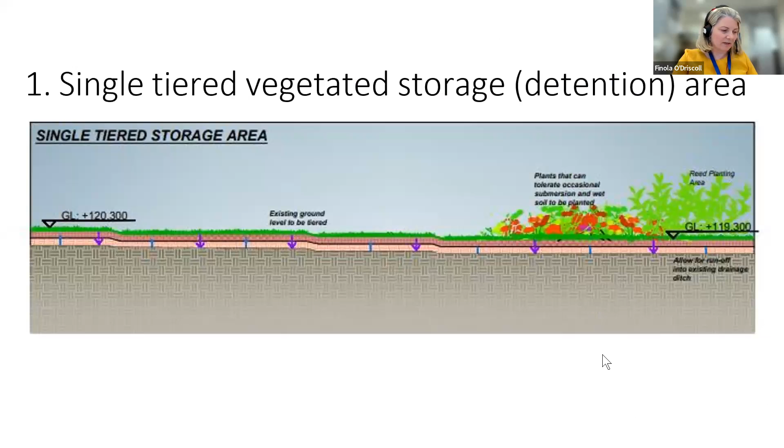So I'm going to introduce Pádraig. Pádraig graduated from Dublin City University with a BBS in business studies, and later at UCD an MBS in business studies. He has over 25 years local authority experience. He's currently Director of Services with Carlow County Council, which includes responsibility for the delivery of infrastructural projects, roads, active travel, URDF, special capital projects. He's the exemplar - if you want something done, ask a busy person, because he's presenting a few presentations as part of this series. He's also got responsibility for the environment and climate action brief, and he's been promoting the assessment, development and implementation of nature-based solutions into the capital works projects of the council. So I'm delighted to introduce Pádraig.

Good afternoon. By way of introduction to this item, to give a bit of background, over the last few years attending webinars like this, conferences, and a lot of subcommittees that our staff would be on, the whole concept of nature-based solutions has been raised and presented. We had been researching into them, and the detail coming through, but a lot of the detail was in relation to examples that were maybe EU based or UK based.

We had a cross-functional team meeting ourselves here in the council, and I basically asked the engineers mainly, had we got a nature-based solution for any of the works programmes that we have? Like many local authorities and other public bodies, we have a substantial number of projects in the pipeline and coming into design - a substantial URDF urban renewal project for Carlow Town, active travel, the roads programme, various public realm enhancements, and obviously the housing programme. So we didn't really have anything - we were basically doing conventional surface water solutions. So I asked the team to go and have a look at possible nature-based solutions that we could integrate into one of our projects.

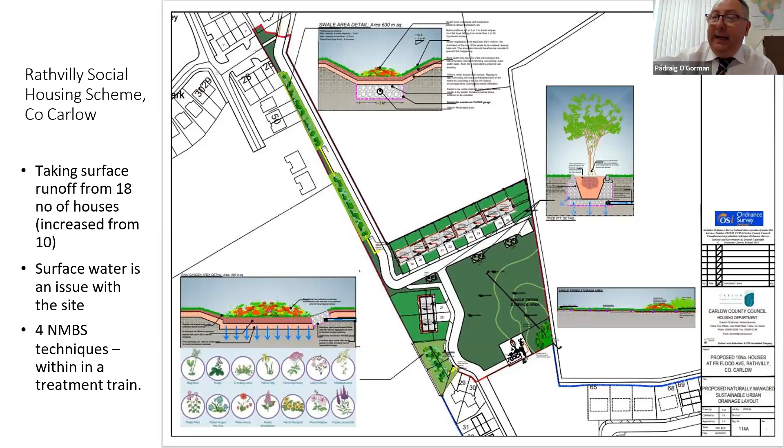Next slide, please. So the first element was to have the single-tiered vegetated storage area. This involved creating a tiered existing ground level, selecting a number of plants that can tolerate occasional submersion and wet soil to be planted in the area, and also a reed planting area. So pretty straightforward, and the detail of that was readily available.

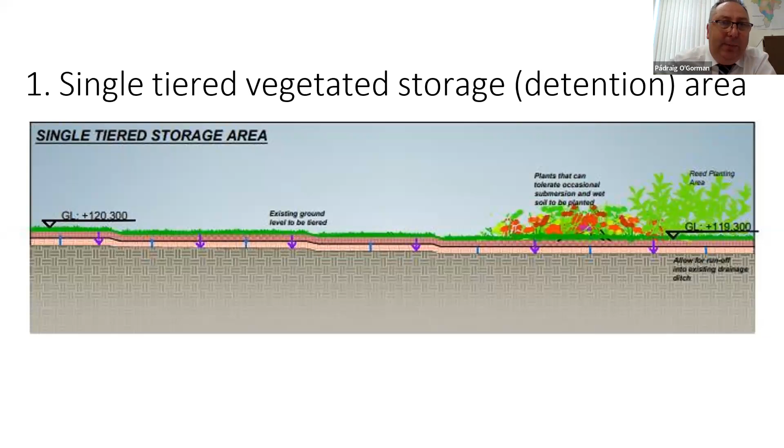Next slide, please. I suppose the main feature then was the actual vegetated swale. Again, the detail was all available in relation to the base that is required, the level of topsoil, the specification for stoning, draining, and then the actual vegetation to be used both on the slopes of the swale and the rounding of the swale, and the various planting then to be in the actual swale itself.

So again, over a period of time, they had tic-tacked with the various contacts in relation to getting that information and determining the proper solution for this site in relation to that specification for the swale.

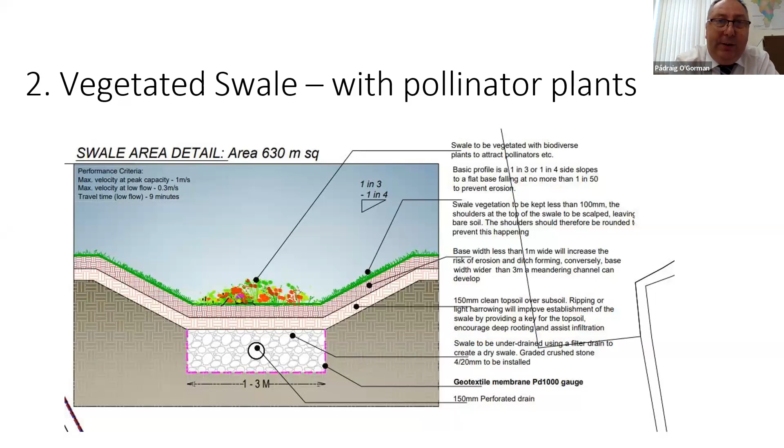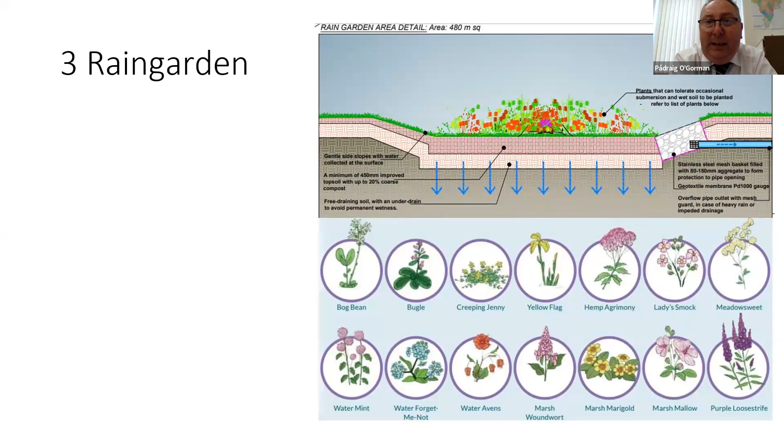Next slide, please. This was the rain garden over to one side of the site. Again, we selected the various specifications that were required, and in-house we contacted our town gardener, Michael Buckley, at the time, and Michael came up with a range of plant species that would assist and be suitable to maybe more wet ground conditions. So he came up with those varieties and incorporated them into the overall design for the scheme.

Next slide, please. The 4th element for the nature-based overall solution was the tree pits. And while this slide looks quite simple, there actually is quite a bit going on here. So we have, first of all, detail in relation to the positioning and specification of the trees. And this is in accordance with DMURS.

Also, specification there in relation to, depending on what species of tree is selected, the proper spacing for it so that it can reach its full potential and maturity. The design shows here that from the roadway, excess water can get into the tree pit, and over here then also a drain so that the actual tree pit doesn't become waterlogged, which would affect the root growth and the growth of the tree.

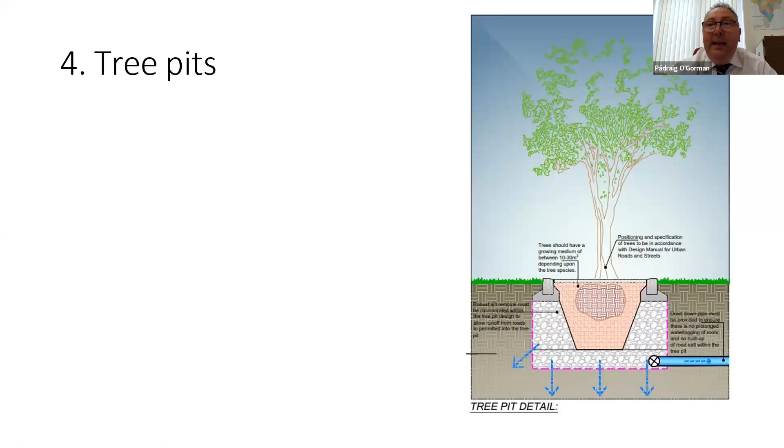Or it doesn't allow for road salt to be deposited and kept in the tree pit. So while it looks a simple design, a lot of detail went into the proper design of it so that you have a proper, effective, functioning nature-based tree pit. Next slide, please.

We got a lot of feedback as we went through it from tic-tacking with our colleagues. I had mentioned about the varieties of plants used in the rain garden, and it had come back to us from some of our contacts that 1 or 2 of the varieties may not be fully suited to a nature-based solution because they might be more suited to dry conditions. So we changed those. And in relation to the swale itself, again, we got good feedback in relation to the vegetation heights that should be used on both the slopes of the swale, the rounding of the swale, and the height that the plants should be allowed to grow to on the swale.

A lot of very, very good help, assistance, and feedback was available as we developed the overall concept and project, and a lot of good feedback came back to us that we then amended and fed into the final design and the 4 elements that I have outlined.

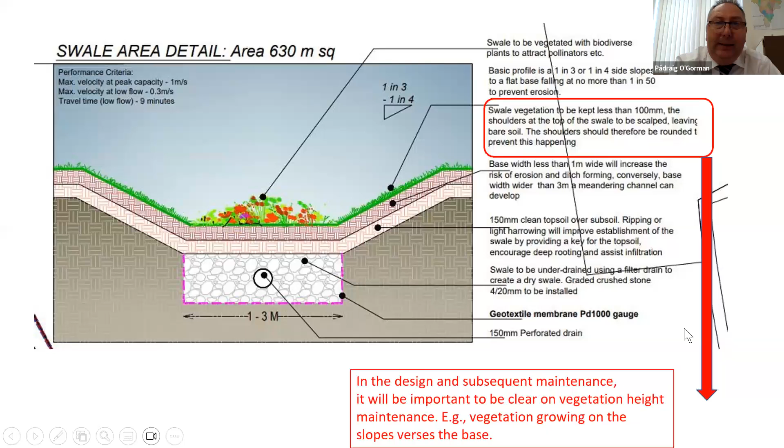Final slide then, please. So in summary, what I'd say is from our perspective, we started from a relative blank page, basically from attending webinars like this, where there were presentations about nature-based solutions. That whetted our appetite in relation to what this was all about, and could we develop a project. From sitting down with our own in-house team, we hadn't really started developing anything in a nature-based solution. We agreed we very much wanted to have a demonstrator project, and I asked the staff to go on and see could we develop one.

There was a very strong willingness from the staff to engage, learn, and develop a nature-based solution. The first one we came up with to feed into a detailed design happened to be a social housing project we were developing at the time, which is the plans we now have presented.

There was an awful lot of advice, assistance and information available through a range of sources - webinars, conferences, recordings, the internet, LAWPRO, etc. A lot of people came back to us once we knew we were working on a project and asked us to send on details, giving their expertise to help shape the final design.

Two important points: it was designed in-house, all four elements, so it was very cost effective. It didn't involve going outside our own engineers, who gave up their time to research what was required and what would be an effective, proper solution.

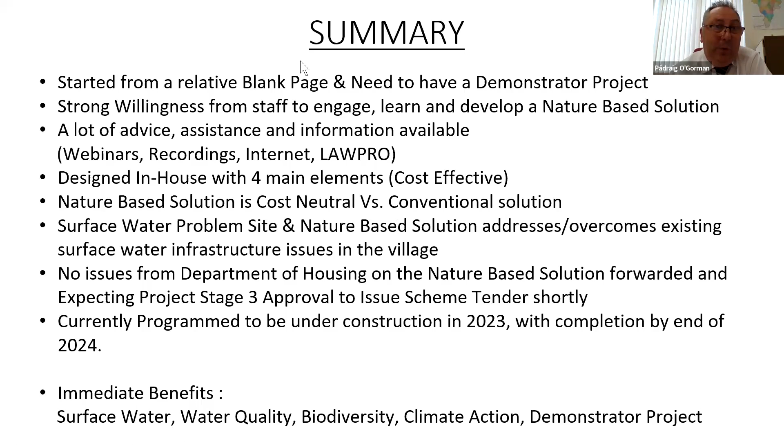The immediate benefits are that it deals with a surface water problem we had on the site and in the infrastructure in the village. It will greatly enhance and improve water quality in the area. There are biodiversity aspects, improved climate action, and hopefully it will deliver the demonstrator project we want on the ground here, so we can learn from it, improve on it, and build it into the design of other public realm infrastructure, roads, active travel, and urban regeneration projects we have in the pipeline.

We also have installed a bioretention rain garden in Carlow town, which is up and running and effectively working, and we'll be doing a short presentation on that next week. So thank you very much.

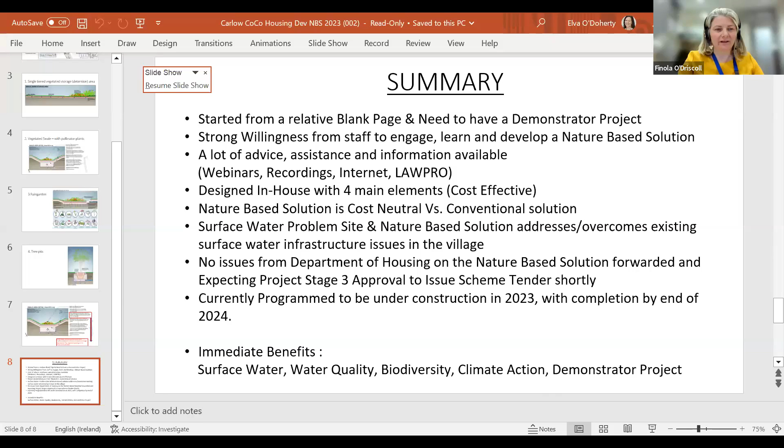That is great, Pádraig. What a fantastic example of pragmatic thinking and can-do attitude, let's get this together. Very reflective of our dealings with Carlow as well - absolutely pragmatic local authority, just wanting to get things done, which is great.

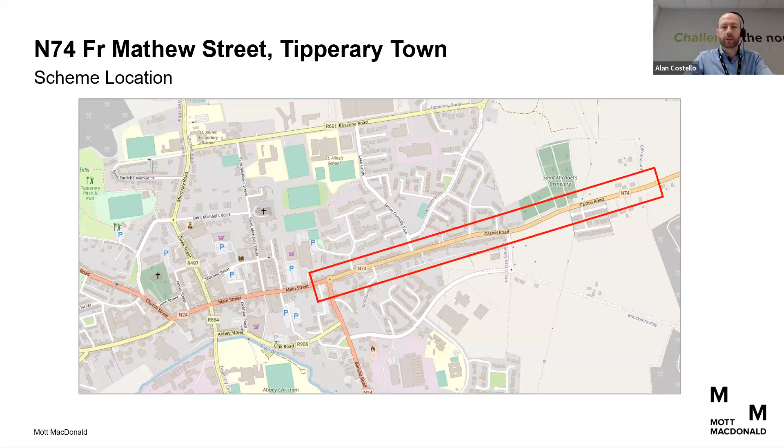The scheme was developed to address a number of issues known to our client, Tipperary County Council, and the funding authority, TII. The first related to road safety. The collision data indicates the collision rate is above the average collision rate, primarily due to poor road layout along the street.

A significant feature of the road layout is the lack of quality pedestrian infrastructure with poor linkages and difficulties crossing at junctions, as you can see in some of the photographs. Another feature is the informal parking that takes place along the street, which impacts passing traffic but also pedestrian movements. The pavement surface is also quite poor and in need of intervention.

There's a noticeable lack of quality green areas and landscaping along the street. Finally, the existing drainage system was in need of renewal, and we'll look at this in a little bit more detail later.

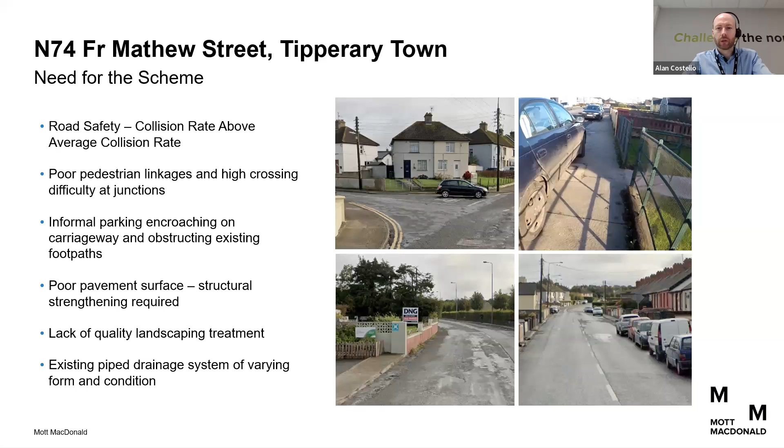To address those needs, the scheme objectives aim to tackle these in a holistic and coordinated way. The first major design decision was to reduce the road width in accordance with DMURS standards to 6.5 metres, then transitioning down to 6 metres. This opened up a whole host of opportunities because it allowed us to reallocate road space to improve pedestrian infrastructure, formalise on-street parking for residents, and probably most importantly for today's presentation, incorporate some high quality landscaping treatments and nature-based solutions.

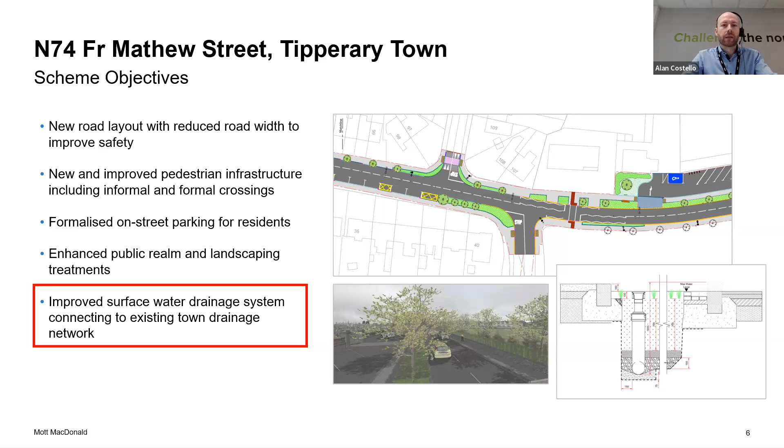So why specifically bioretention areas? There were a couple of features of the existing drainage that needed to be addressed. It was an existing combined sewer which experienced surcharging during extreme rainfall events. Any intervention we went ahead with needed to improve the drainage capacity of the existing network and try to relieve some of the hydraulic loading downstream.

Secondly, we wanted to incorporate solutions which dealt with the first flush where possible to improve water quality. The scheme had already committed to incorporating high quality landscaping treatment where road space was being reallocated, so there was an opportunity there to incorporate nature-based solutions in those areas.

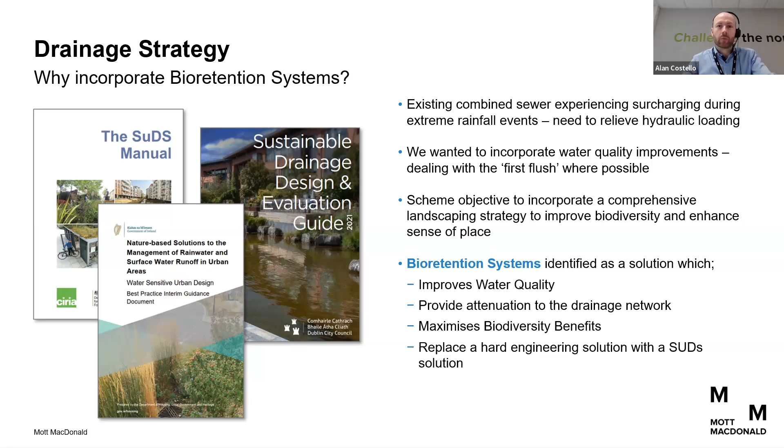Referencing the available guidance, and utilising experience within Mott MacDonald and other similar road schemes, we proceeded to incorporate bioretention systems, which have a lot of benefits. The first being that it improves water quality. They also provide attenuation to the drainage network, maximise biodiversity benefits, and replace hard engineering solutions with a SUDS solution. My colleague Aidan will now take you through the bioretention system design and some of the stakeholder interactions that we had.

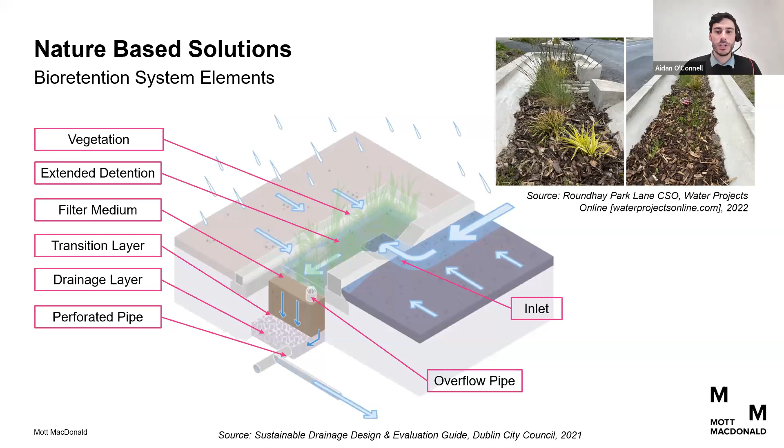As I just mentioned, a perforated pipe is located at the bottom of the drainage layer, and this collects filtered water that passes through the system and conveys it to the drainage network. As well as all this, an overflow facility is required to direct flow downstream if the volume of the bioretention system is exceeded.

In relation to the location of the bioretention systems on the N74 Father Mathew Street project, due to the upgrade and realignment of this scheme and the carriageway, areas for landscaping were created between the new carriageway and the footway. And it is within some of these areas that we have sited the bioretention systems.

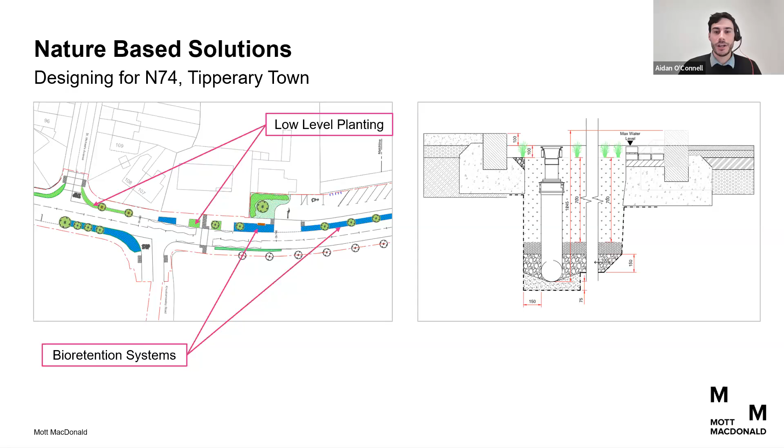This bioretention system detail is what we developed as part of the N74 Father Matthew Street Road Improvement Scheme, and I will go through the detail of each of the elements of our design in the following slides.

The main items on the surface of the bioretention system are the inlet, extended detention, and the vegetation. The inlet of our bioretention system comprises 650mm wide gaps in the curbing to allow surface water to enter the bioretention system.

Just inside the inlet, granite aggregate setts are located to act as a silt trap. These setts also slow down runoff entering the bioretention system to prevent scouring of the soil within the system. The extended detention depth is specified as 100 millimeters in our system.

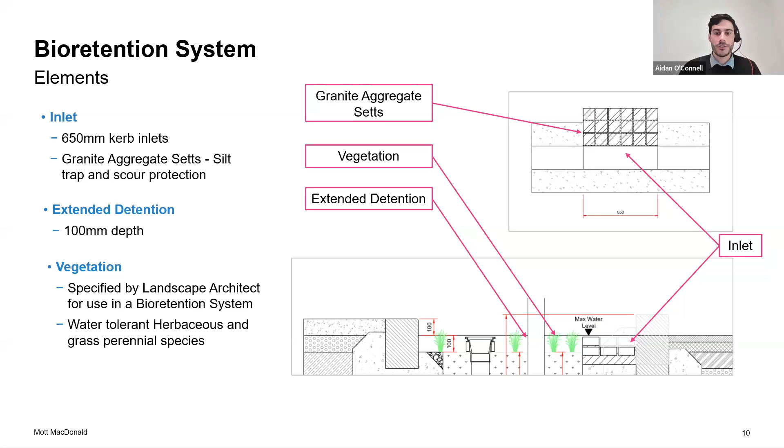The vegetation on our system has been specified by a landscape architect for specific use within a bioretention system. What I mean by this is that they are specified for use in times of drought, as well as when the area is saturated. And the general type of planting specified for our system is water-tolerant herbaceous and grass perennial species.

The main engineered soil layers are the filter medium, the transition layer, and the drainage layer. A 700 millimeter depth of loam soil comprising 45% sand, 35% topsoil, and 20% compost has been specified for the filter medium. This composition was specified to allow flows to dissipate into the lower layers, but also to control the dissipation of water through the layer.

What I mean by this is that the water doesn't filter down through the filter medium too quickly. The element of organic matter within this layer is to provide nutrients to the vegetation on the surface.

Below the filter medium is a transition layer, specified as 100 millimeters deep, made up of clean, well-graded sand with less than 2% fines. This is in order to prevent fines from washing from the filter medium above into the drainage layer below.

Underneath the transition layer is the drainage layer, proposed as a minimum of 150 millimeters in order to provide sufficient cover to the perforated pipe within it. This is type B filter material.

Our bioretention system has not been designed for infiltration. Therefore, the drainage layer is sloped towards a perforated pipe under drain, as shown on the image on screen. Because the system hasn't been designed for infiltration, an impermeable geomembrane is also proposed around the bioretention system.

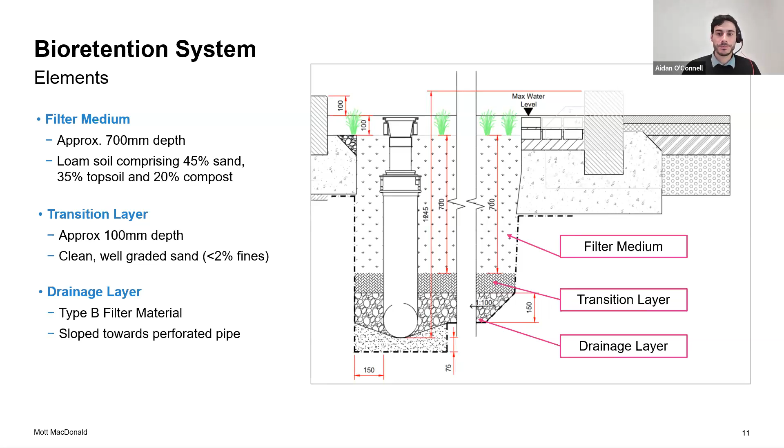I suppose those are the main engineered soil layers. As well as these, there is some pipework and other items associated with the bioretention system.

As mentioned, the drainage layer is sloped towards a perforated pipe under drain. This pipe collects the filtered water that comes down through the filter medium and transition layer and conveys it towards a gully pot at the downstream end of the bioretention system. This filtered water is then conveyed from the gully pot to a dedicated surface water drainage network within the carriageway by means of 150 millimeter diameter gully connection pipework.

The gully grating at the top of the gully pot also acts as an overflow in situations where the volume of the bioretention system is exceeded. Along extended lengths of bioretention system, overflow hoppers are proposed which collect any water in an overflow scenario and discharge it into the perforated pipe, which then conveys it onto the surface water drainage network.

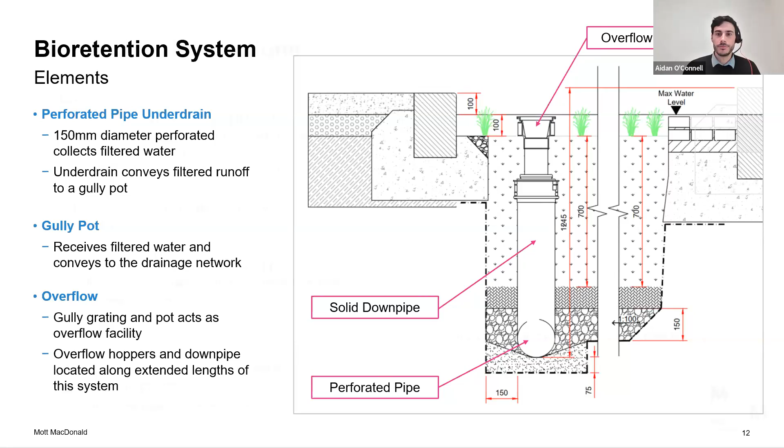Those are the main elements of our bioretention system, and I will speak a bit now about the stakeholder interactions that took place during our detailed design.

The main stakeholder interactions with respect to the bioretention systems were with TII. Firstly, there was close communication and consultation with a TII landscape architect at an early stage to establish a landscaping strategy, with the hope of promoting opportunities for nature-based solutions, which were then incorporated into our detailed design in the form of the bioretention systems.

As well as this, as a rule, TII Road Safety were informed of all design developments, including the bioretention systems, and comments were welcomed from this team.

TII's publication Drainage Systems for National Roads states the drainage arrangements permitted on national roads, which our scheme is located on. As bioretention systems are not included in this, a departure from standard was required to permit its use on the N74.

Early interactions with TII landscaping and road safety, as mentioned above, fed into the departure application, which helped the process of preparing the application. This departure from standard was submitted to TII and was accepted.

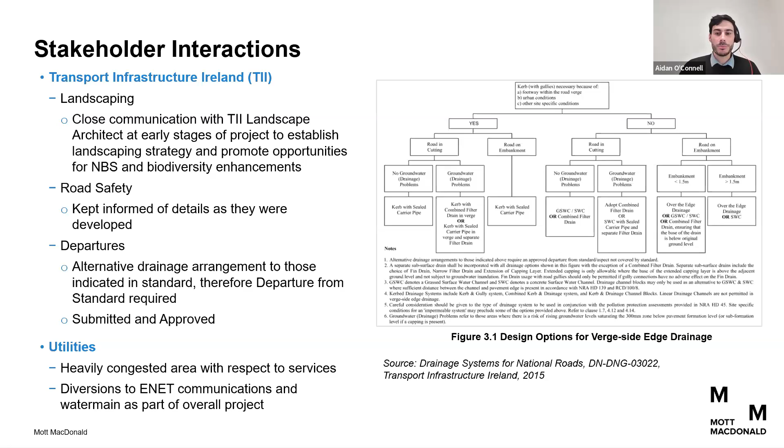Diversions of ESB networks, communications, and water main, in consultation with those providers, were required. These diversions were kept away from the bioretention system as much as possible to avoid possible issues arising down the line, and I'll touch on that on the next slide.

In relation to the opportunities, it is very important that nature-based solutions opportunities are identified, promoted, and adopted at an early stage during consultation with the relevant project stakeholders. When this is carried out, it makes the introduction and application of nature-based solutions into detailed design much more straightforward.

On our scheme, during the detailed design of the bioretention systems, it became very evident that a multidisciplinary approach was key to incorporating these systems into the road improvement scheme. These systems can't be designed or sited in isolation, and we found that close coordination between drainage, landscaping, and road design teams was required to ensure that the opportunities for nature-based solutions were maximised.

Interactions between bioretention systems and utilities is a big consideration, as extensive consultation with the provider is required where utilities are located within the bioretention system. However, this can be managed in the process of including these systems. Where utilities do interact with bioretention systems, the provider needs to understand the reinstatement arrangement of the system, when or if the utility may need to be exposed, and the bioretention system reinstated. Monitoring will be required to ensure the system is reinstated appropriately.

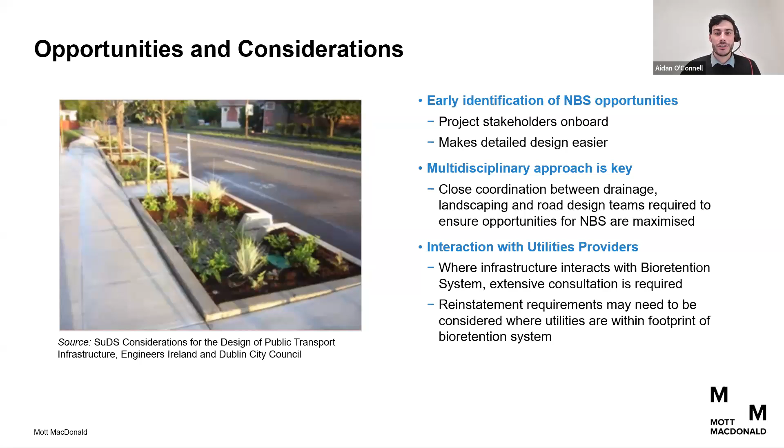Great, thank you. That was great, guys, and lots of detail there. And I know lots of people listening in want the detail, they want the dimensions, what will fit.

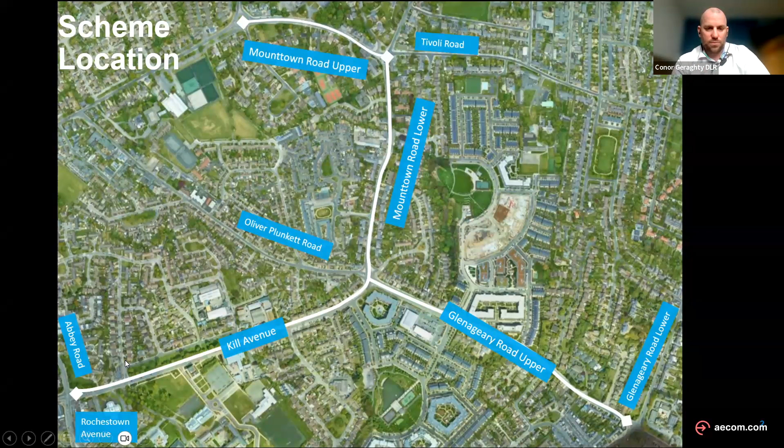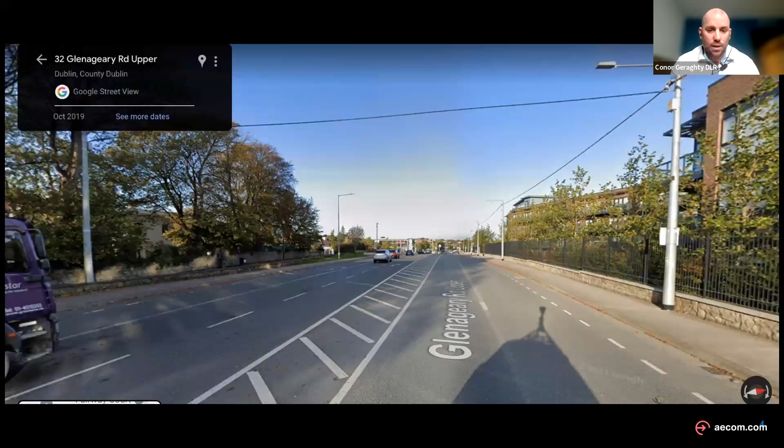It's just a little over 3 kilometres in the urban area of Dún Laoghaire, connecting from one corner of most of the urban area across 5 very large signalised junctions. The existing situation is quite traditional in its approach to road infrastructure: multi-lane crossing points, staggered or segregated crossings for pedestrians, slip lanes, and very wide carriageway space. Similar to some more traditional road schemes, it's dual carriageway with an almost entirely impermeable surface wall to wall, with no planting and no infiltration or nature-based solutions along any of it.

So the challenge, or the primary objective of this scheme, was to provide and retrofit active travel facilities into it. That's obviously the NTA focus at the moment, to try and get more people to walk and cycle.

A secondary objective was to improve public realm, to include things like seating, to align with age-friendly policies, and to provide incidental play—play facilities along the length of the route rather than designated playground facilities.

We obviously, with areas like this that are so heavily paved, have an impact on the drainage systems, and there are flooding issues in the area. So the scheme has an objective to reduce that, and to align with our climate change objectives, which includes increased planting and providing active travel facilities.

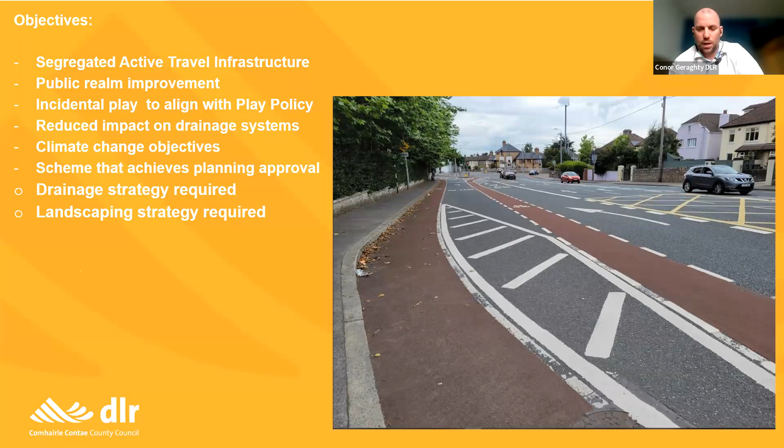This scheme had to go through Part 8, the statutory planning process for local authorities. Within that, our own drainage department requires a drainage strategy in advance of any plans being submitted. We also have to provide a landscaping strategy. So at the very earliest stage of the project, we were thinking about how best we could incorporate SUDS and nature-based solutions into our scheme.

When it comes to active travel projects, it can be quite a challenge to deliver these schemes, particularly when you're suggesting reallocating space from one mode to another.

There's some word associations we did as part of a survey. It's quite interesting that pedestrians are generally seen as vulnerable, slow, careful, sustainable, friendly and nice—not surprising, since everybody's a pedestrian and less likely to be critical of themselves. Whereas cyclists are perceived as fast, rule breakers, reckless—there's an element of toxicity with the idea of cycling and cyclists. So when you're trying to reallocate road space to that mode, it can result in a lot of negative feedback. It's also worth mentioning that within Dún Laoghaire, 46% of people surveyed said they had no interest in cycling, regardless of what facilities were provided. That doesn't mean they would object to providing for cyclists, just that they were not interested in cycling.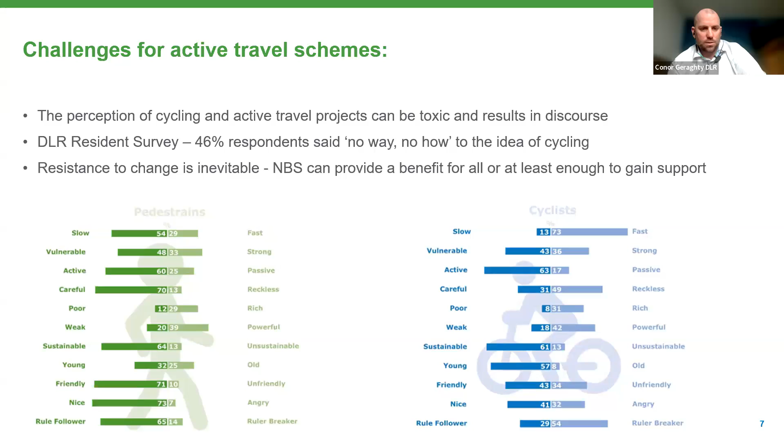Within these types of projects, if you're trying to deliver large-scale mobility changes, nature-based solutions can add real benefit, where people who aren't interested in cycling can still see the value of supporting a scheme because they get much nicer places to live.

This slide is one of the early concept discussions we had about how to deal with surface water within the project.

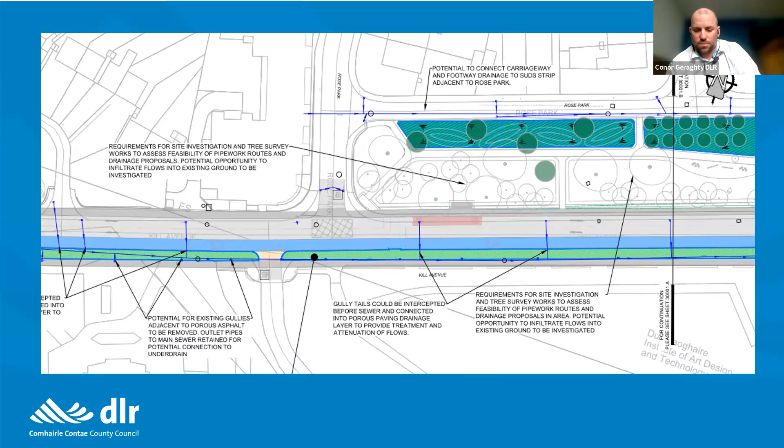On the green hatching towards the bottom, we were considering permeable paving along the length of the cycle track. The northern section is an area of green space where we looked at underground attenuation facilities, an existing green space parallel to our project that's incredibly underutilized.

Residents don't tend to use it that much. There's no paths through it, it's grassed. You'd get an occasional person walking the dog, but otherwise it's an area that's not being used.

Looking at the drainage strategy, one of the early things we identified is the need for an underground attenuation facility. Knowing we had to carry out works in the park, we started thinking about how to reinstate it, looking at things like adding pathways through the green space to enhance it, new planting, active travel, incidental play facilities, and things like swales and retention areas.

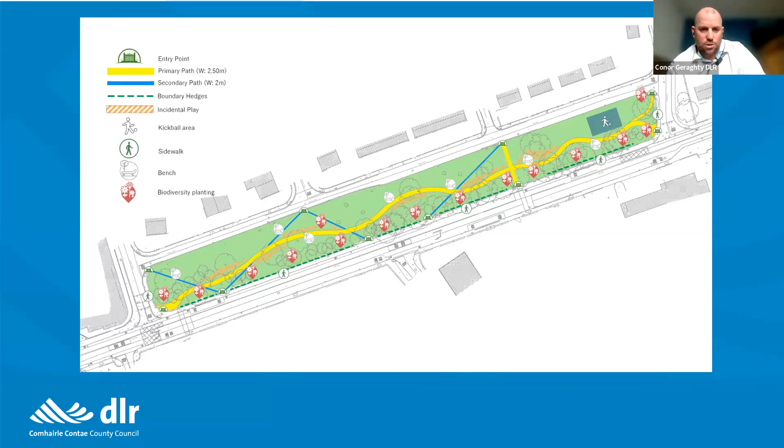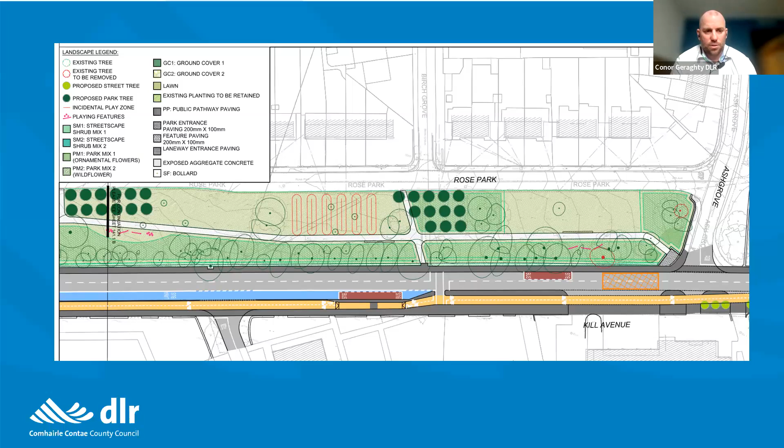The scheme that went to Part 8 included new paths through this area, on top of the underground attenuation facilities, new tree planting, swales, retention areas, and incidental play features.

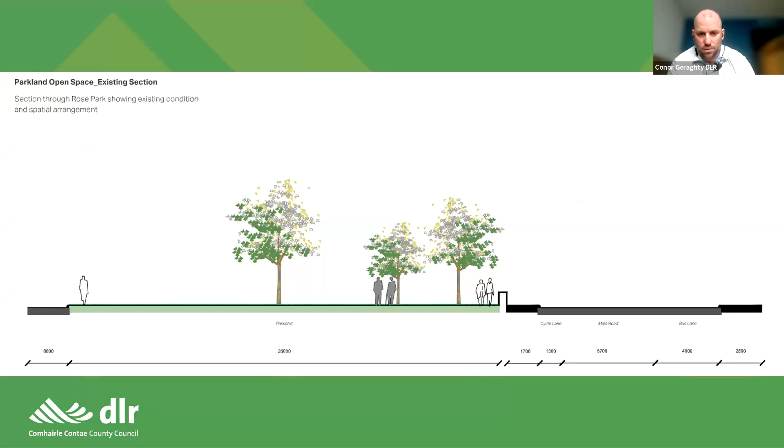The existing cross section of that green space is quite bland, there's not a whole lot in it other than some tree planting. What's proposed then is areas of meadow planting, new footpaths, mounds and swales, giving a lot more character to the area.

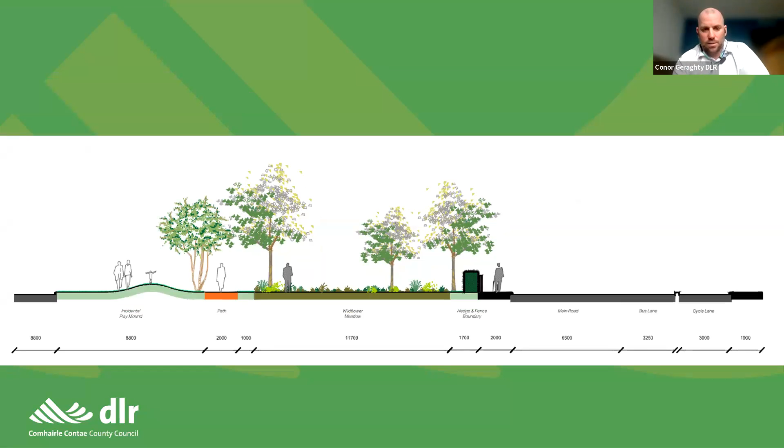The support you get from that is people see the value of the project because they're getting all these extra facilities close by.

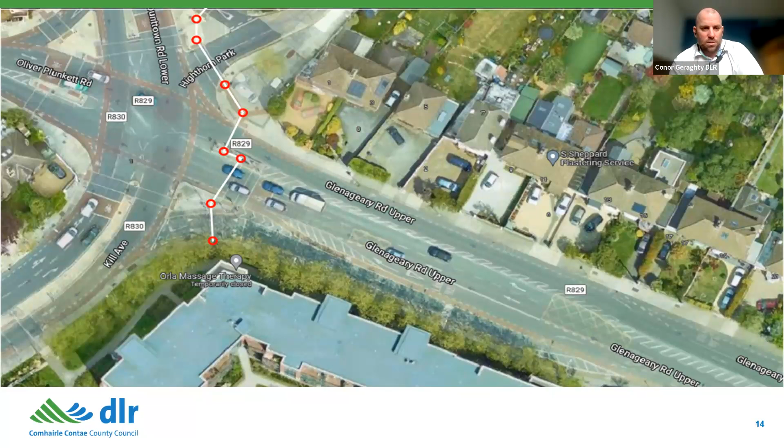When it comes to junctions and the road layout, these lines show the existing situation for people walking. I think it's an eight-stage crossing as a pedestrian, so if you were trying to cross from one side to the other, it could take up to 15 minutes to cross all these side roads if you were to go with the lights.

The scheme that was designed essentially reduced the carriageway width, removed slip lanes and turning lanes, and provided segregated active travel facilities through the junctions.

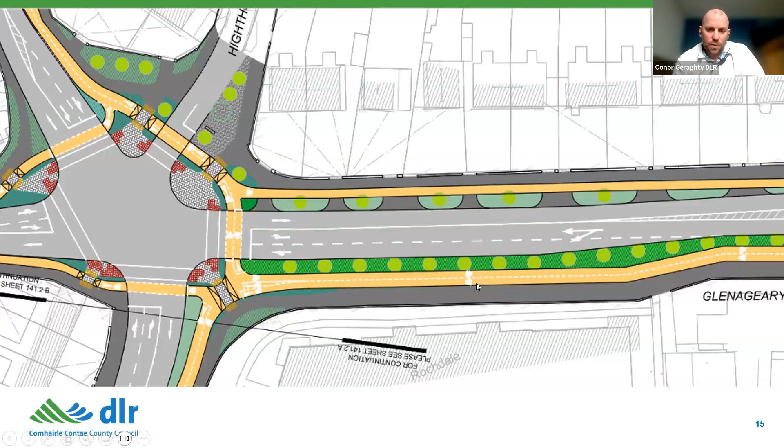That allowed for the inclusion of these green strips. The benefit for active travel is that it provides horizontal segregation from the carriageway, but it also gives us areas we can use and design for bioretention, tree planting, or other greening of the area.

On the opposite side of the road, the tree planting provides noise barriers and more pleasant areas for the people living there, so there is a value to them supporting the scheme.

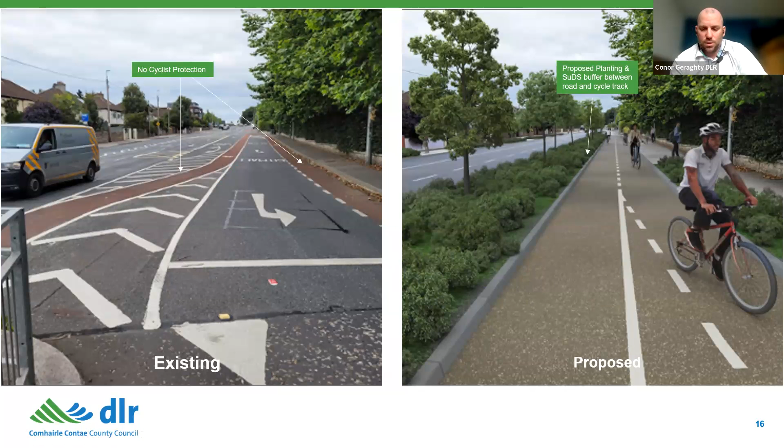When you're retrofitting schemes, you'd obviously like as much as possible to not have to re-profile the existing road or dig up as much of the carriageway. So you're trying to minimize that, particularly at the moment when everything is so expensive.

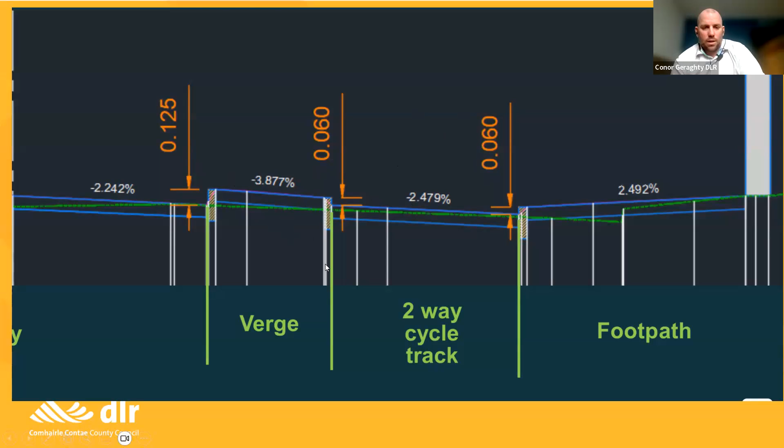By maintaining a footpath of a 2.5% crossfall and providing a 2.5% crossfall on the cycle track, we're able to use the verge in the planted area to deal with the level issue. There's nearly a 4% drop from the road edge to the cycle edge, but the planted area deals with that difference, meaning we can leave the existing road profile on the rest of the carriageway. So having these planted verges really allows flexibility to build things much quicker and cheaper, even though there may be a cost associated with installing them.

So within this project, including nature-based solutions from the very start did facilitate and allow the segregation of the active travel facility. It included public realm and facilitated incidental play. It's achieved our objectives and reduced the impact on drainage systems.

So when we went for Part 8, there was somewhere between 200 and 300 submissions, and we had about 78% positive support for the scheme. A lot of that relates to the benefit that people saw from the softer side of the planting.

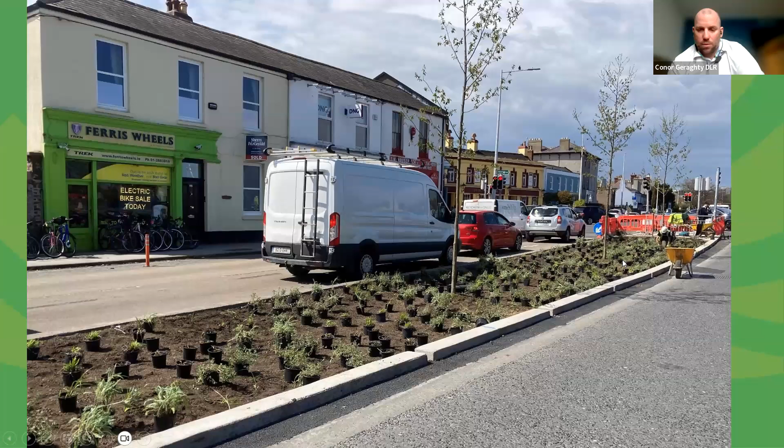There's a scheme on the Rock Road just near the boundary with Dublin City Council that's currently under construction, and the existing median in the carriageway is just a paved surface that provides no real benefit. So as part of the scheme, we retrofitted it - we removed all the cobbles and retained the existing road edge curb and created a retention area for water.

And we put slots in the curb along it - there are 100 mil slots every 3 or 4 meters to catch surface water. So it's not a huge retention area, but it does allow an enhanced visual entry point into the county, while also adding a surface water attenuation area.

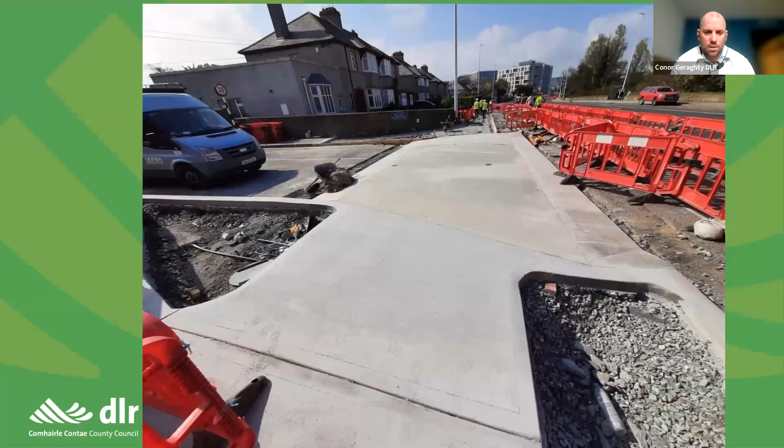Further along the Rock Road, there's a fairly standard detail at side roads again, where it's dished down into a ramped crossing. Similar to Lower Kilmacud Road, we're retrofitting continuous path crossings along all of these areas. So this is a new precast curb that we're using to provide the transition up across the footpath.

And these are the areas that have been excavated for the rain gardens on the four corners, similar to Lower Kilmacud Road. They help deal with this transition so that people don't walk or try to walk across this area and potential trip hazards, but also reduce the level issues for cars turning left.

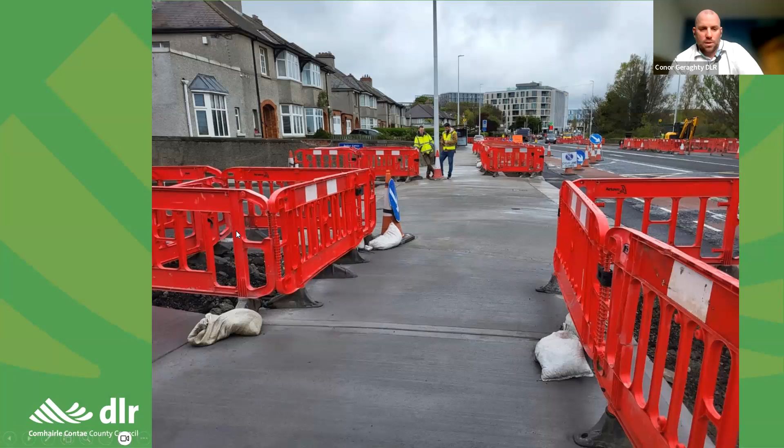So these areas have yet to be planted, but that's what it looks like along the footpath now for pedestrians, and the four corners that are barriered there in that photograph will be planted up in the coming weeks.